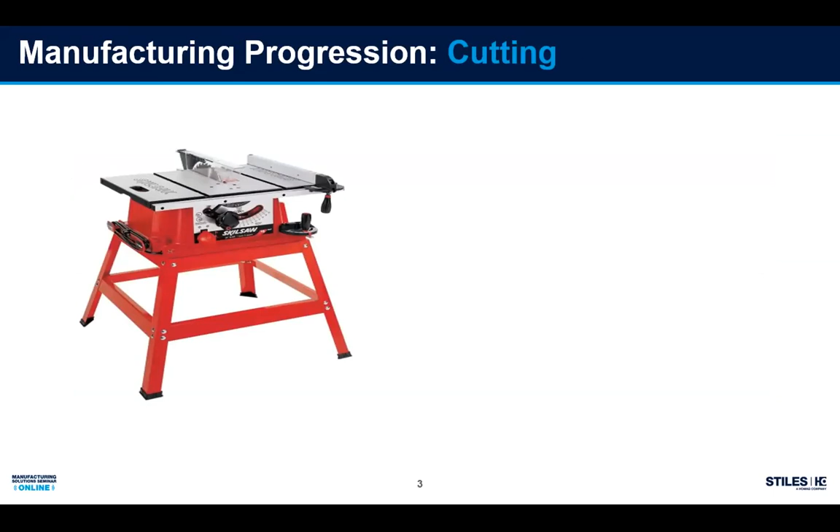As you started out in your company, you may have started with a simple table saw like this to do your cutting, and you realized, I need to step it up a little bit. I need more precision. I need more production. So you transition to an Ironwood sliding table saw, which will give you those things. But as your production increased, you could transition to something more automated. This HOMAG SAWTEQ is a highly automated, very precise way to cut your parts.

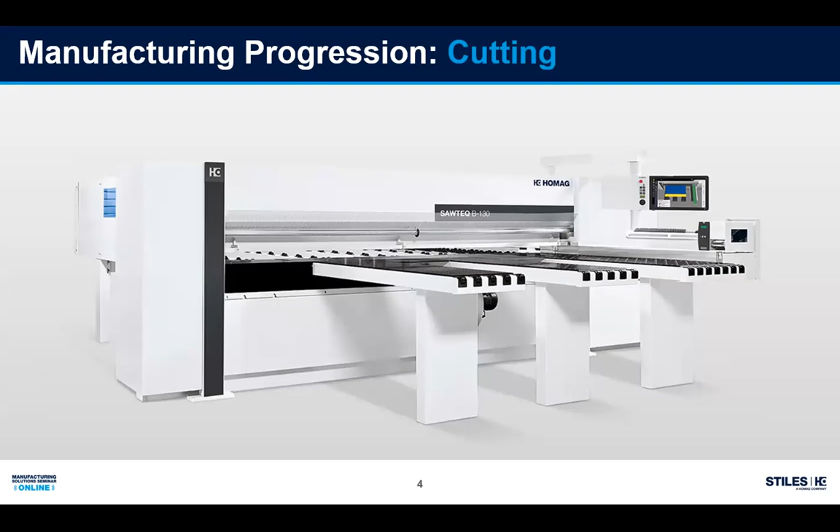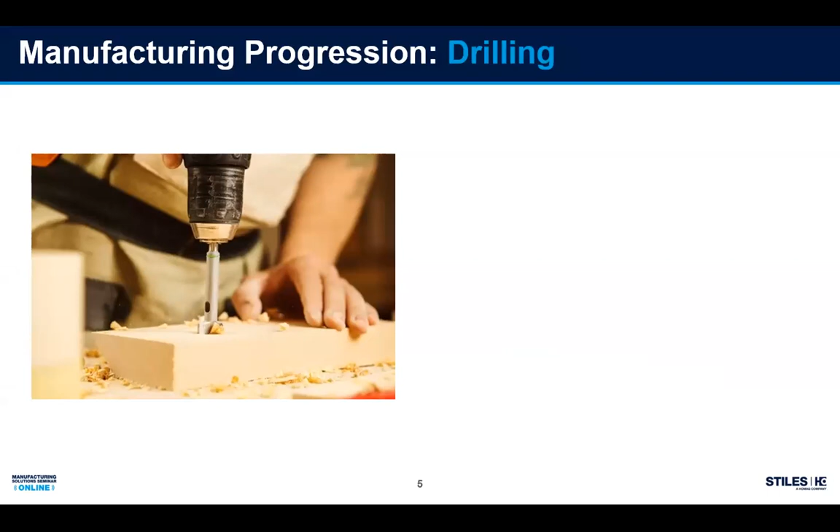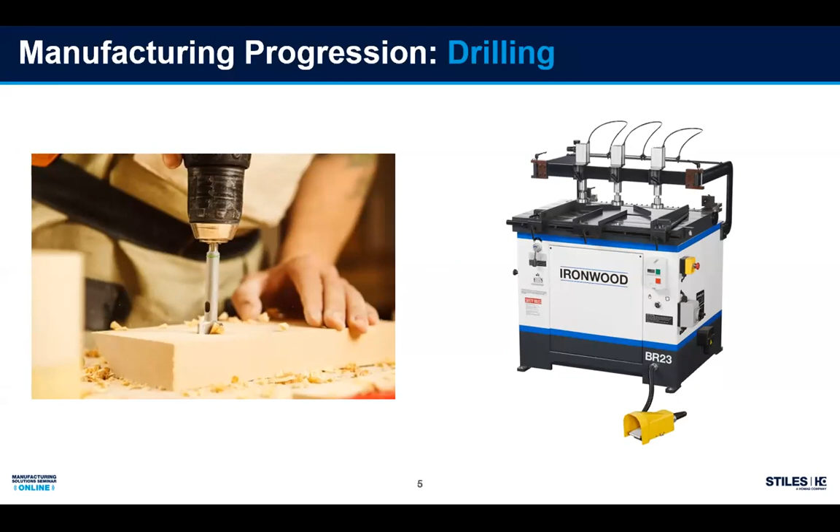As far as drilling, this is pretty antiquated, but shows a point. You had to start somewhere when you realized I need more precise drilling, more production. You transition to something like this Ironwood drill machine. And then eventually you possibly progress to this HOMAG DRILLTEQ series, which gives you the high automation and high precision for your drilling needs.

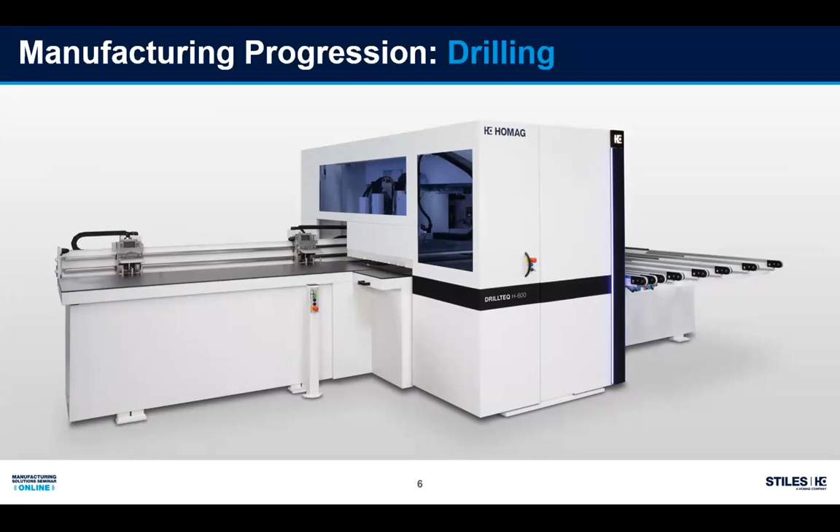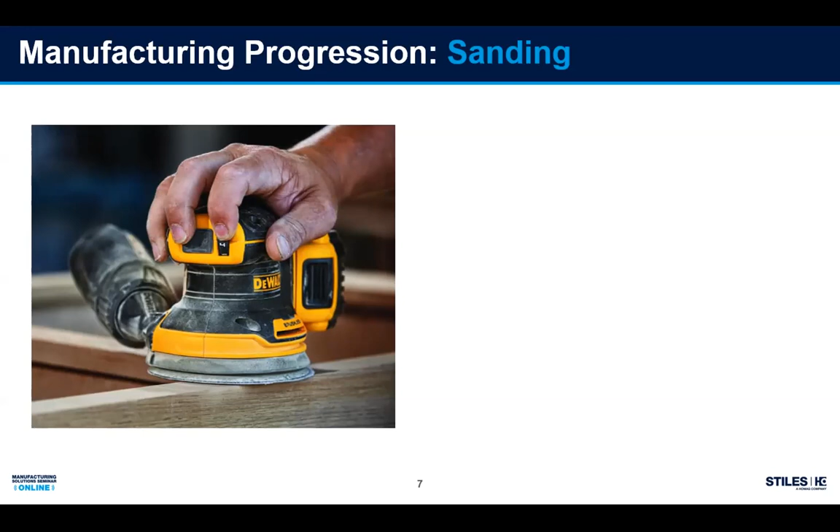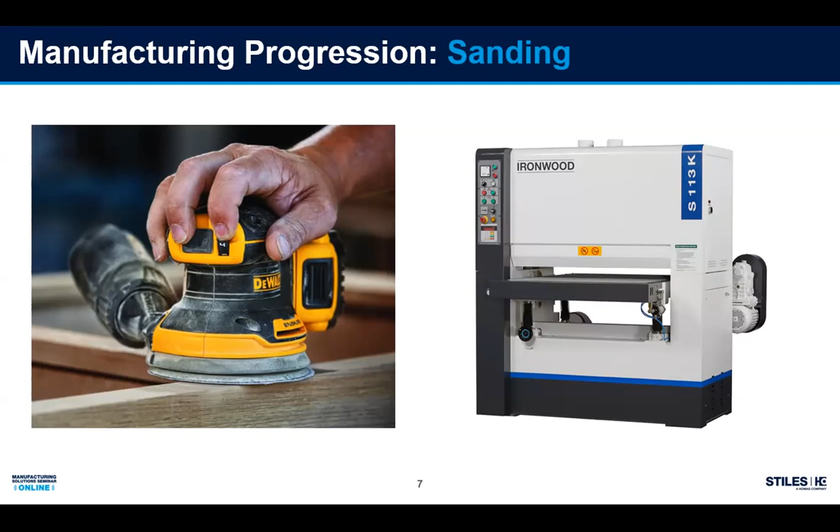The same way with sanding. I'm sure you've all used a hand sander. It does the job, but it's not very uniform in its sanding application. So you progress to, let's say, a mid-range wide belt sander. You can increase your numbers and get your uniformity of sanding part after part. But as production numbers increased, you transition to a more highly automated type, more precise with segmented pads and platen heads. So this would be your next progression in your sanding area.

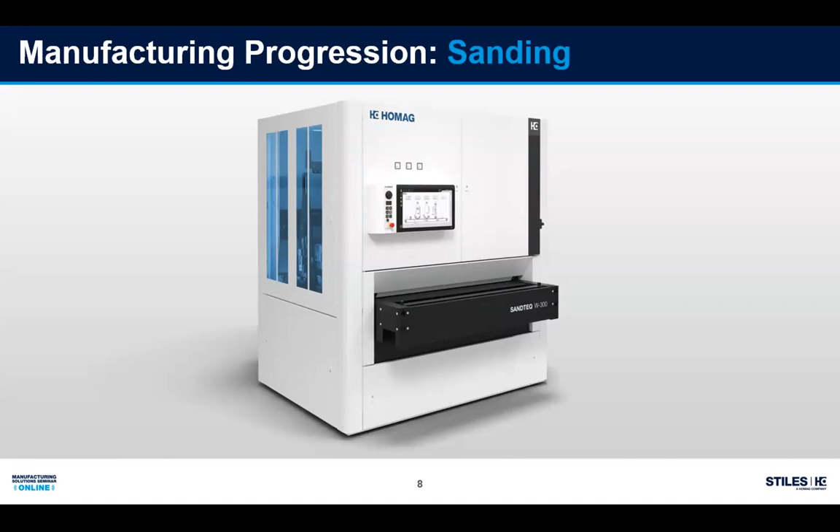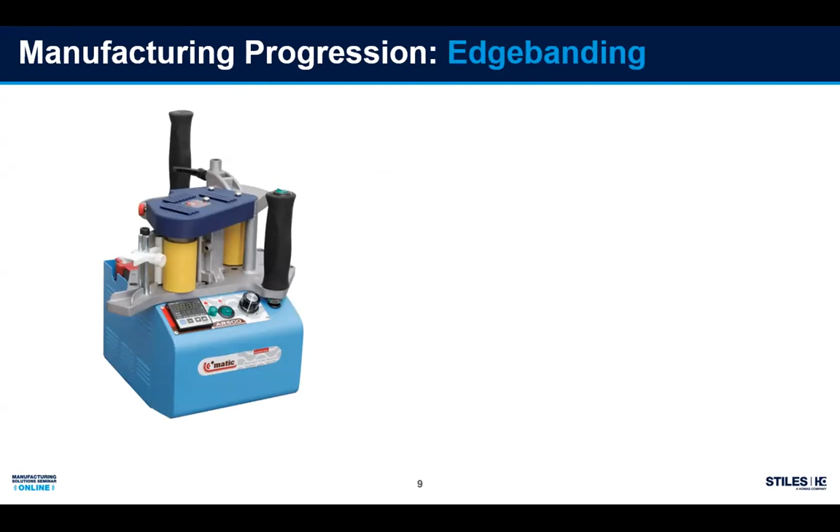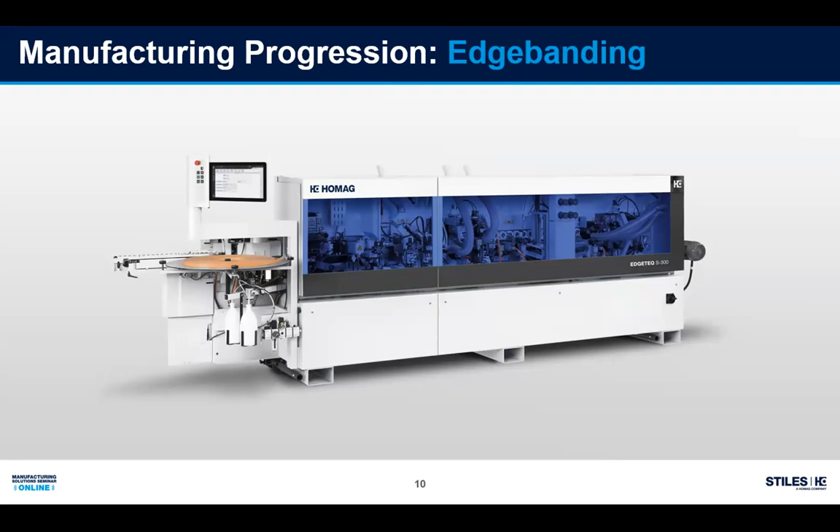So why did you make those changes in your other areas? Well, one of the reasons is efficiency. You waste less time, and like we mentioned before, your accuracy is greatly improved by making those changes. And that's going to improve your overall quality of your product. Those two combined are going to give you better production, which means increased profit.

Something you may not think about, but safety. If you notice all those things that we looked at early on in the slides, they were manual operations. So you have someone physically doing those jobs, and it can be demanding on those individuals. All those things add up together for cost savings, material and labor cost savings.

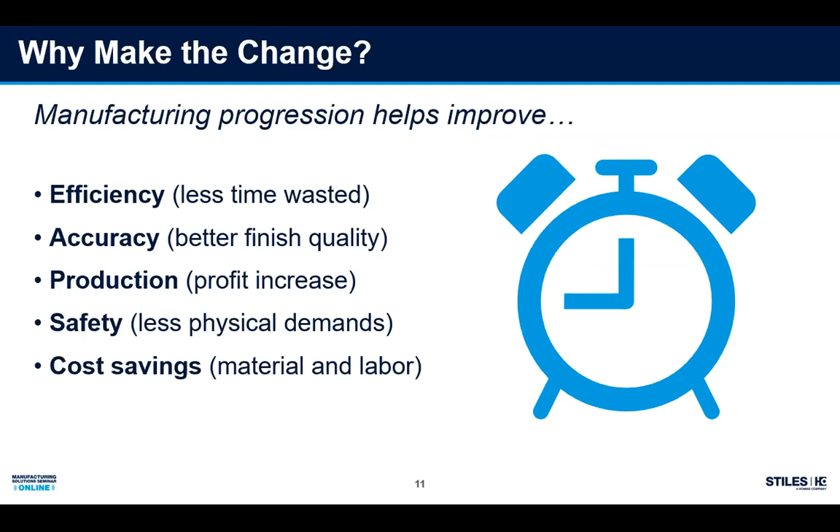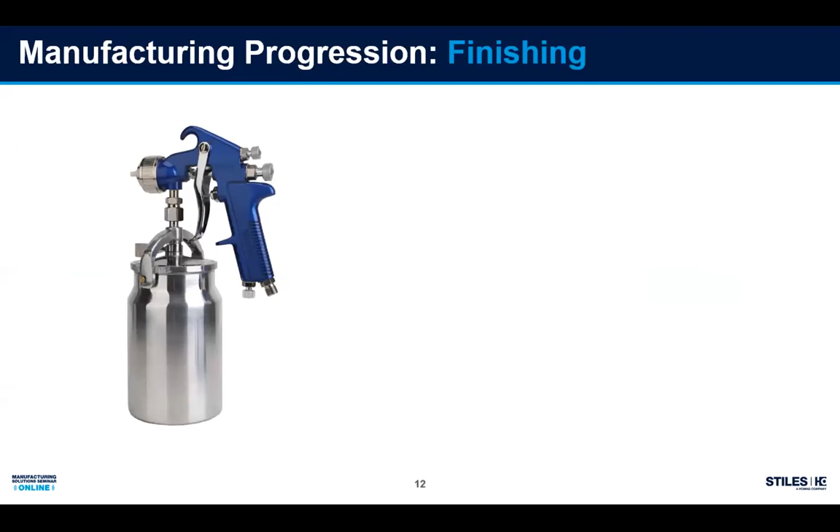The same thing could be said and done for finishing. If you've done any kind of painting at all, there's a good chance you started out with a cup gun. Now envision that cup gun holds a quart, a quarter of a gallon of material. It's probably 3 to 4 pounds of weight sitting there as you're spraying with that cup gun. You quickly realize my arm's getting tired, I need something better. So you probably progress to a gun attached to a long hose that's attached to a 5-gallon bucket, which allows the person to keep spraying.

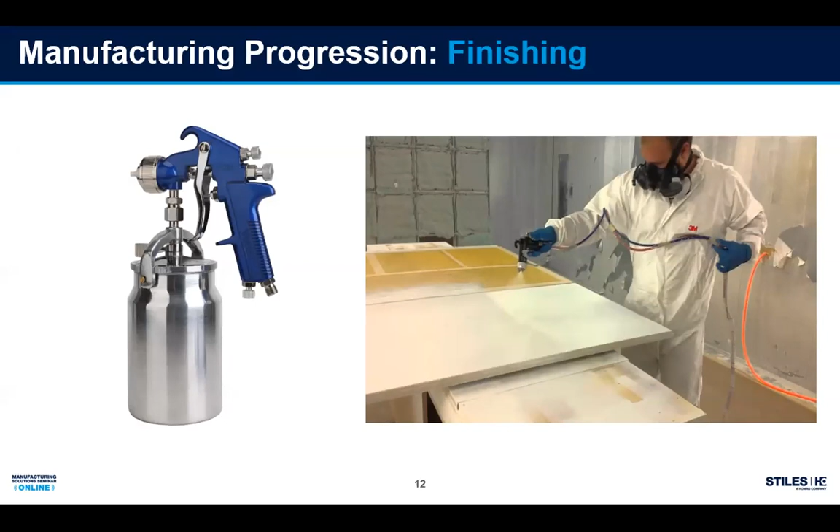But we need to think about something. Once he finishes that part, he has to put the gun down, take that part out, bring another part into the booth to keep spraying. The goal is to keep those guns spraying as much as possible throughout the day. Pay attention to those filters in the back and the walls. Finishing is a dirty environment, and that'll lead us into a point coming up in a couple slides. So we've gone from cup gun to a better way to spray manually.

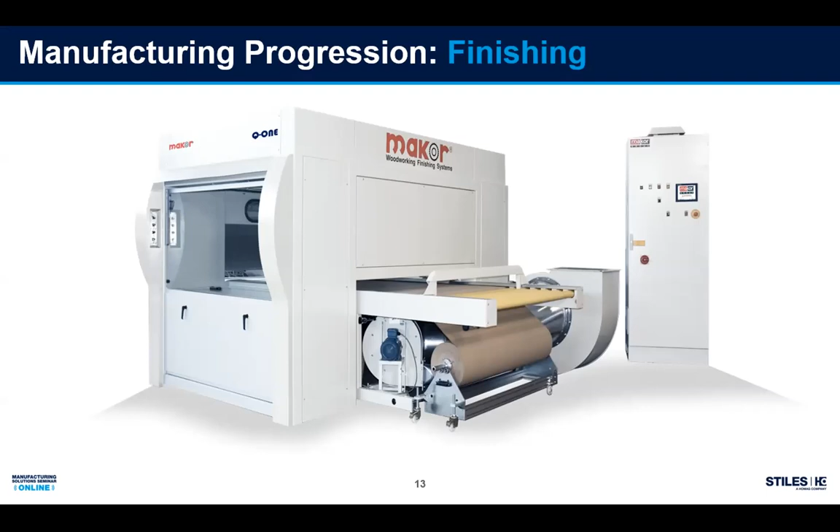And this is your solution for automation in finishing. We can greatly improve quality of application of the coating material, as well as production numbers. So let's talk about how you're doing your finishing today, manual spraying and transfer efficiency.

Transfer efficiency is the amount of coating material that you're spraying that's actually reaching the part. If you remember those filters a couple slides back, they were dirty, the walls were dirty. That's the material you've lost in that transfer efficiency.

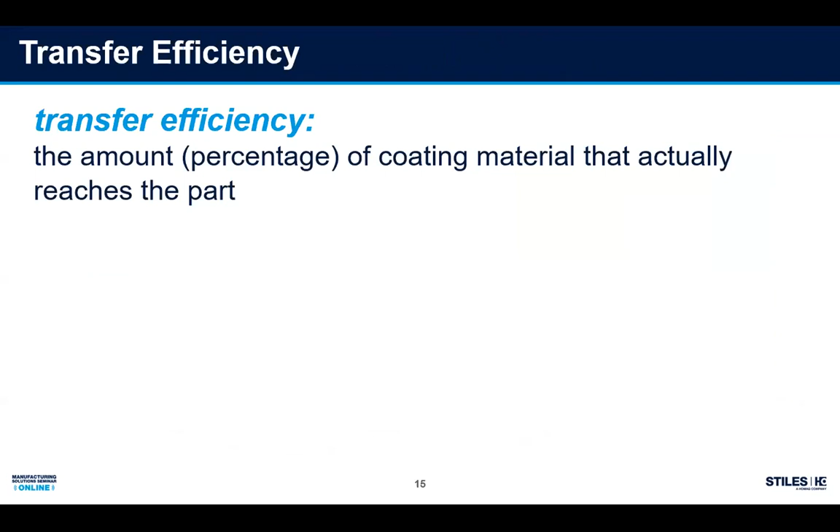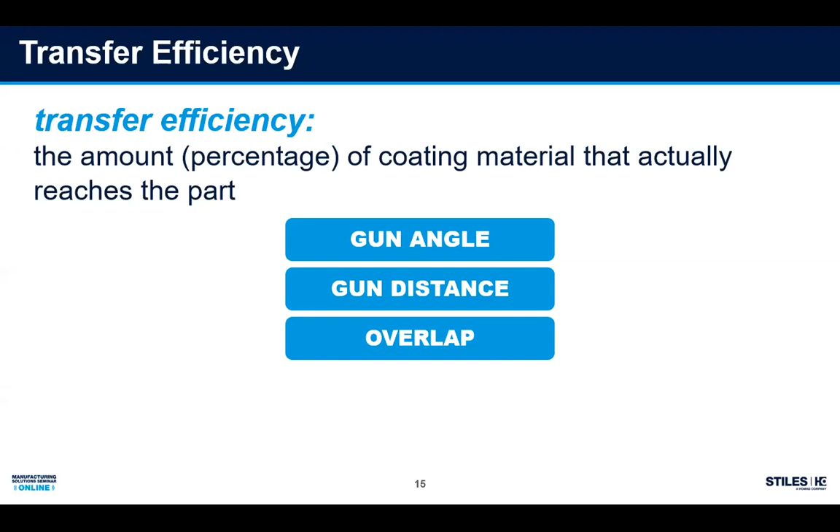What can affect your transfer efficiency, and in turn quality, is gun angle, the gun distance from the part, your overlap as you're spraying that part. Are you overlapping correctly? The stroke speed, you may not think about that, but it's very important. And also human judgment. If they're doing all those things correctly, they still could start out spraying great in the morning, but as they start to daydream and get tired, things can change.

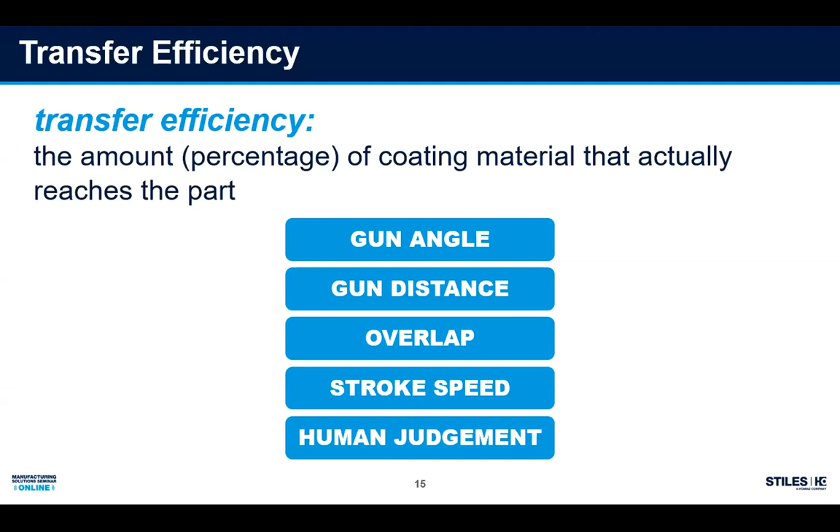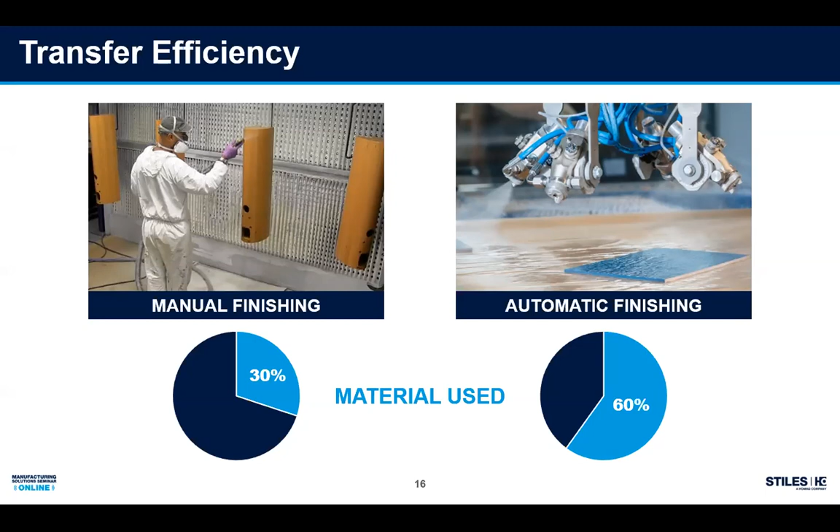Flatline finishing can give you 60%, and sometimes more, transfer efficiency. So there's an opportunity for savings. Let's say you're spending $100,000 a year spraying manually. Just by going to a flatline spray machine, we can save you $30,000 a year. Now you're at $70,000 a year, and that's your first opportunity to start applying that back to your return on investment for that spray machine.

So that sounds good, but how can a spray machine save you that much? All these five things here—let's look at each one of those.

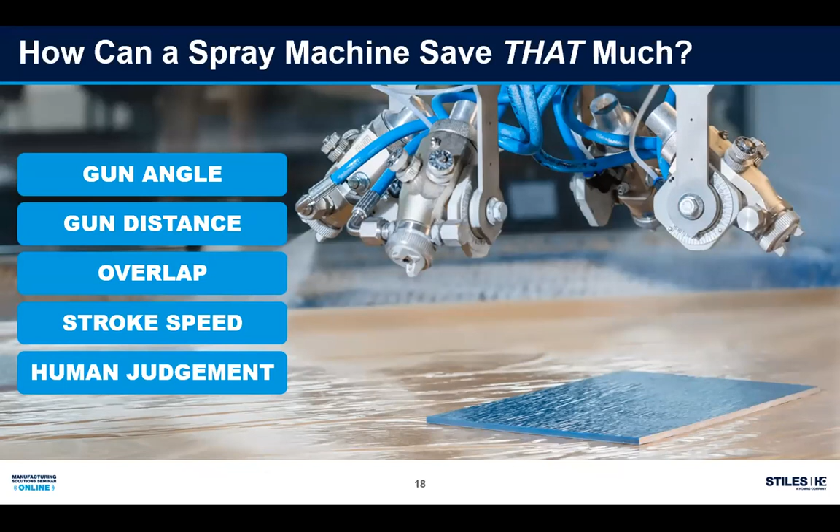But time and time again, if you watch sprayers in factories, they'll start cheating. They won't go all the way to the left and all the way to the right, so the coating starts to feather out on each end—a good coat in the middle of the panel and feathered out on each side.

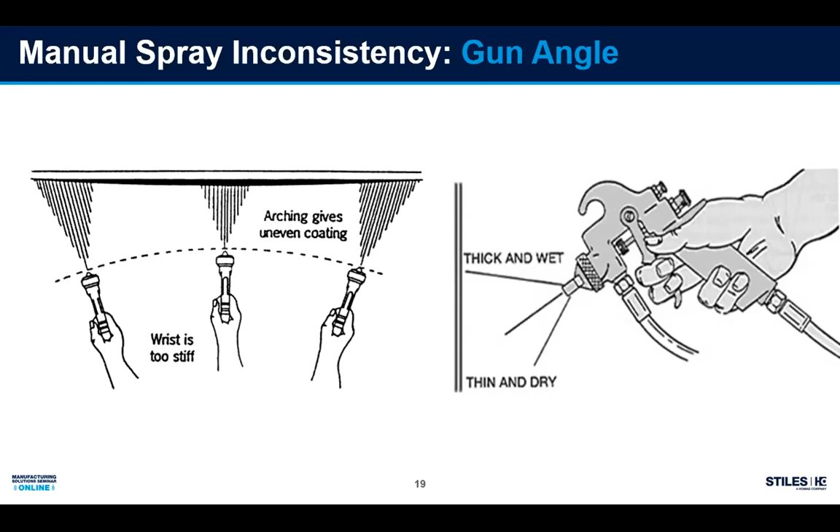On the other illustration here on the right, notice that the gun angle is tilted forward. It's not at a 90-degree angle, and that spray pattern coming out of that tip comes out in a V shape. So if you're closer to the top edge there, you're going to apply a thicker coat, and opposite of that, on the bottom side, it's going to be a thin, drier coat.

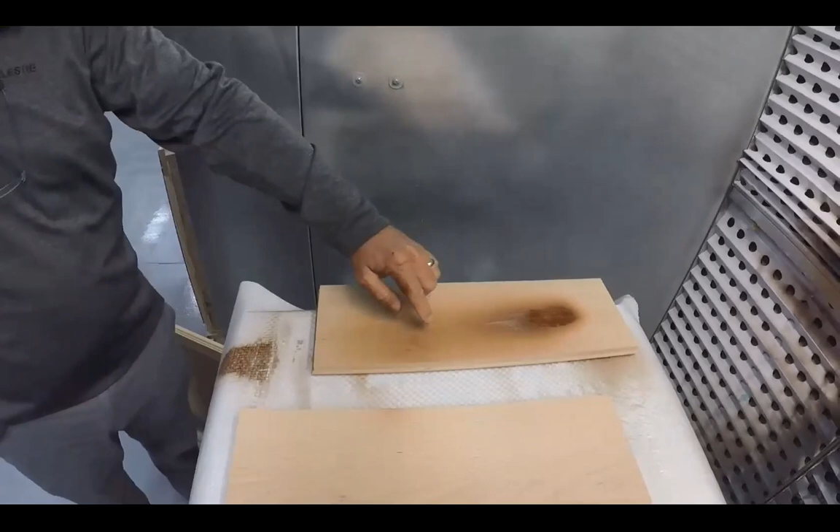Let's look at what that looks like in real life. Here, my gun is angled too far forward, and you can see I've sprayed way too much on the top edge of that pattern and not enough on the bottom. Here we're showing the opposite—my gun was tilted back. Now I'm heavy on the bottom and thin on the top of that pattern. So now I know when I'm spraying, my gun angle is important.

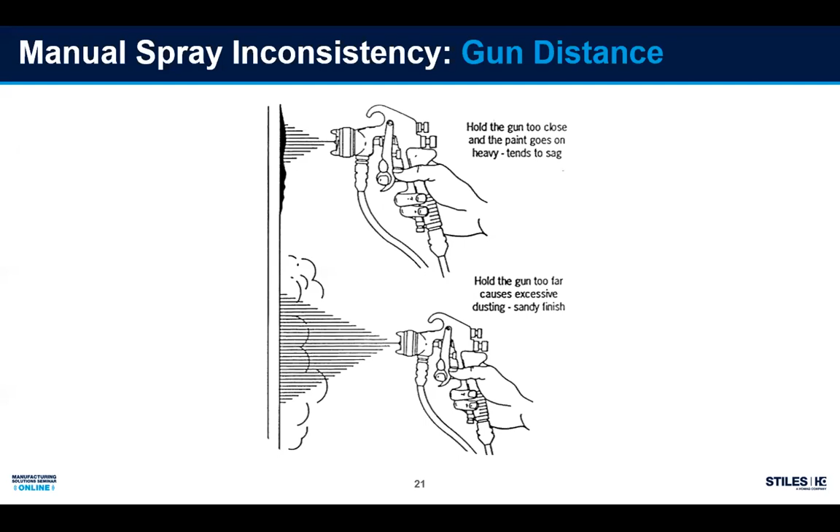Let's look at that in real time. Here my gun is too close—a narrow fan pattern, too much material. And then the second, it was too far away—it's kind of a light coat, not attractive at all. So as a sprayer, gun angle is important, and now I've got to keep in mind gun distance. I've got to be thinking about those two things.

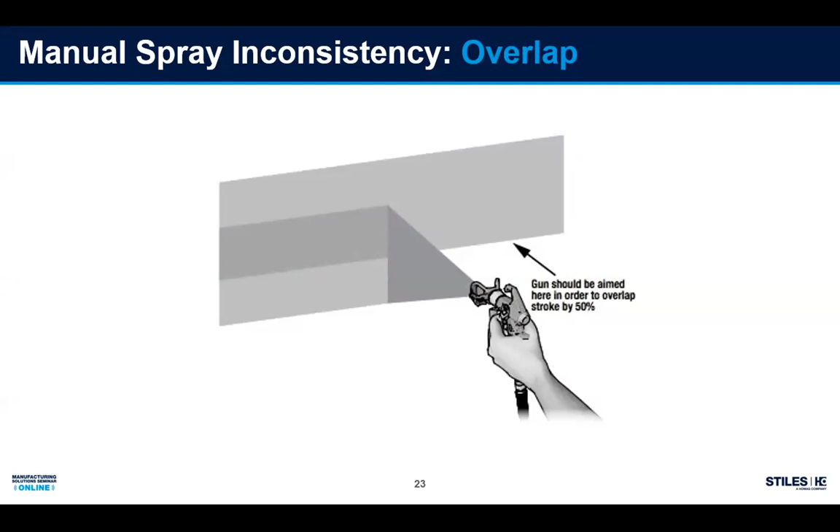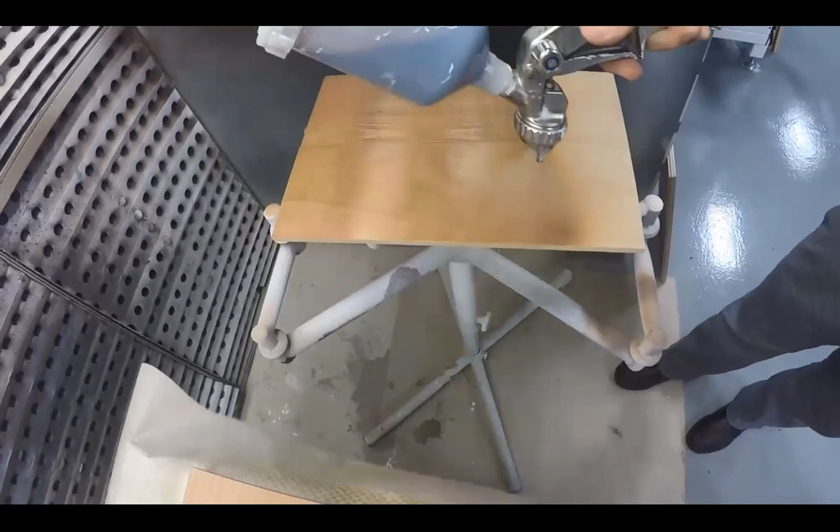Next, I have to think about, okay, I'm holding my gun correctly, same correct distance—I need to overlap my spray pattern. I need to overlap that pattern by 50%. So let's look at what happens when you don't do it correctly. Here's one pass—I didn't overlap. And now, an old term that's been used is 'cornrows.' It's missing areas, it's light streaks. Obviously, that's not what we want.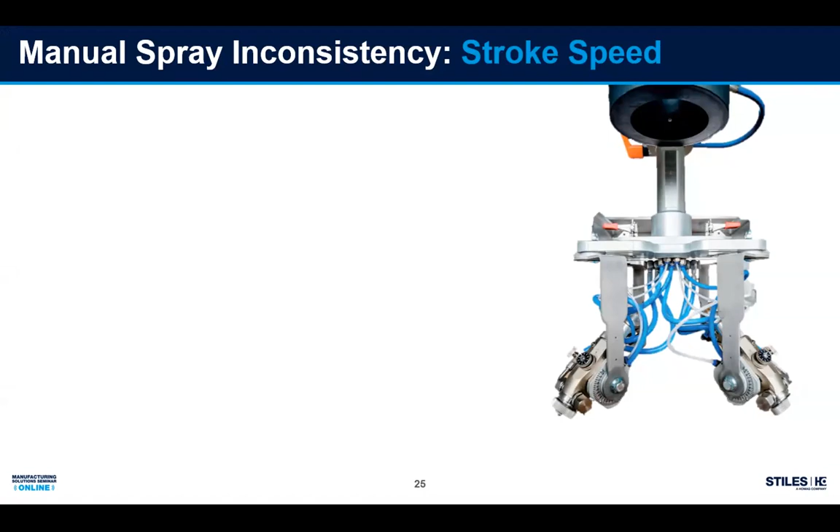So we also have to think about stroke speed and the overlap. One oscillation of a spray arm gives you a complete back and forth stroke. We know by oscillations per minute, in conjunction with the conveyor line speed, we can achieve the correct overlap part after part after part. You don't have to think about it, just load the parts.

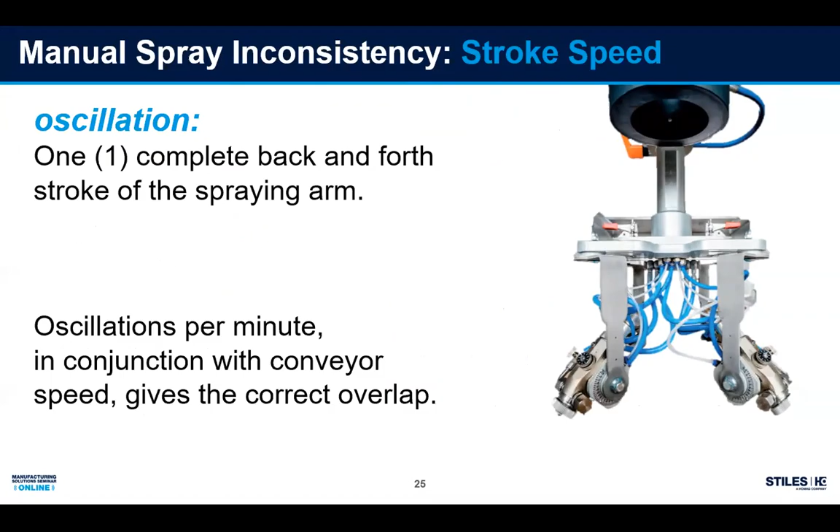So now there's 4 things I have to be thinking about spraying manually. I've got my gun angle, I've got to remember to keep that constant and correct. Gun distance, got my overlap to worry about, and now the stroke speed, all those tie in together. And if you miss one of those 4, you've got a problem.

So let's look at how we can improve on that. How can we take some of those variables out by going to finishing automation?

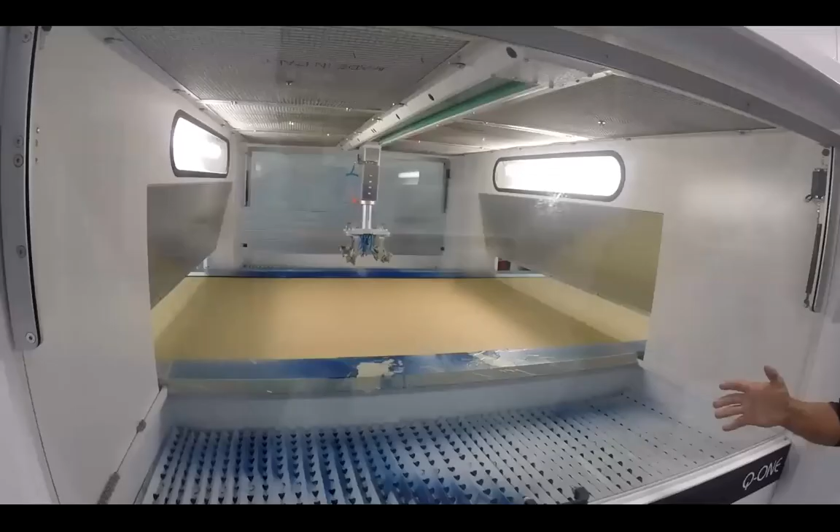Here's just going to show this spray arm traveling back and forth. Notice the speed is constant. The distance from the part is the same. Those guns are fixed, they won't move. We've got those locked in to ensure we spray a good coat all around your part. And that line speed, as it's conjunction with the number of strokes per minute, we know our overlap is going to be taken care of.

So, finishing has always been considered more of an art, but there's things that we can do, just like we talked about, to make some aspects more of a science.

So what is flatline finishing? Basically, it's a way to improve, it's a way to perfect what a human can do in the finishing area. We can greatly increase your throughput and your quality and uniformity of finish by moving to a flatline spray machine.

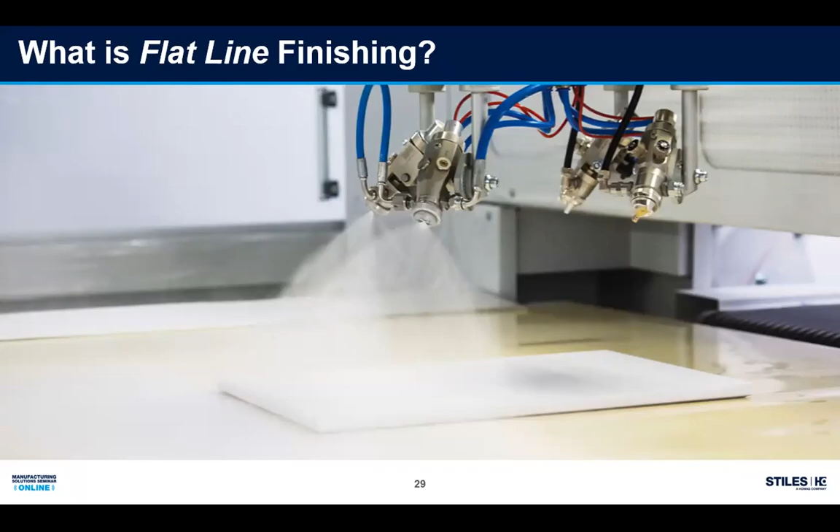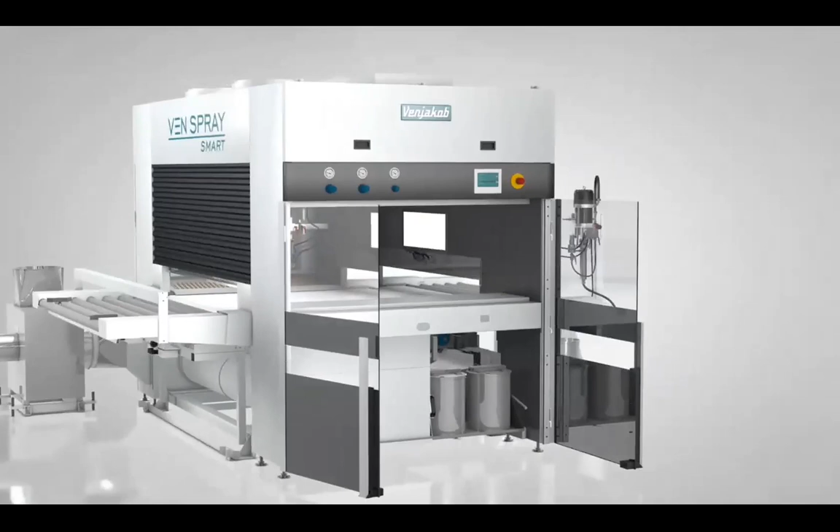Now, here's an example of an animation of what a spray machine does, how it works. This particular machine is a hybrid machine, meaning we can use a paper belt, or we can use a self-cleaning Mylar Teflon type belt to carry the parts through.

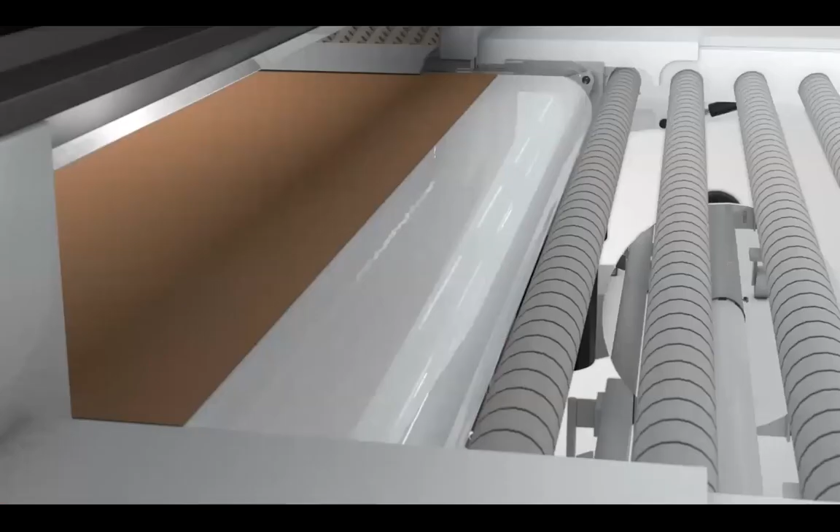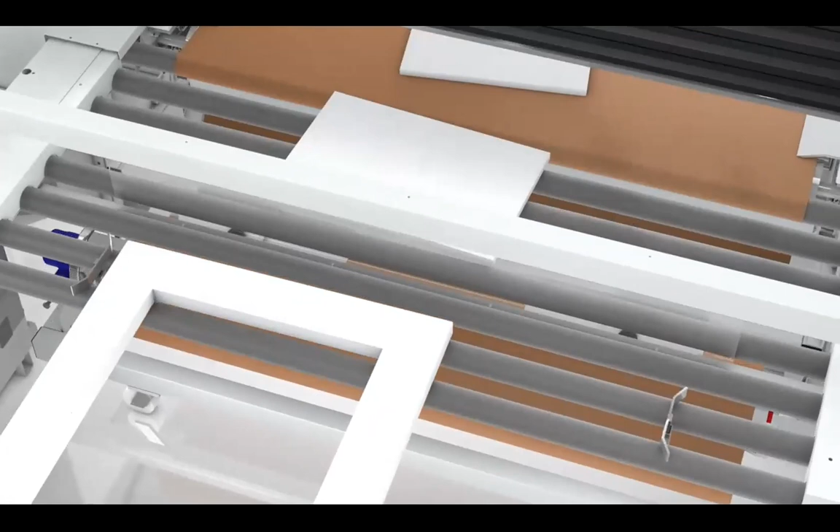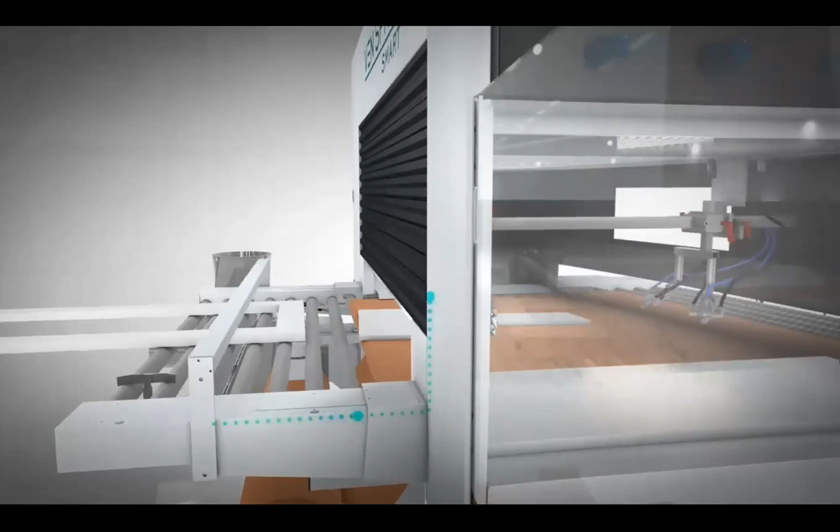Here we're moving, loading our paper onto our pickup roll, and we'll start loading our parts. Notice as the parts are coming in, there's a reading bar there, a sensor that's reading the dimensions of the part, so it'll know where the part's oriented on that belt and what that part looks like. And it sends a signal to the guns to fire off and on. This is how we can achieve a better transfer efficiency and get that 60% plus transfer efficiency.

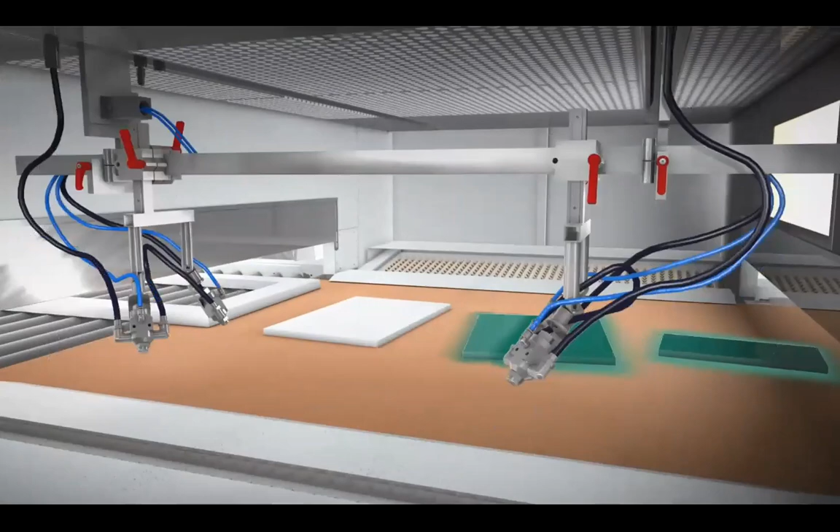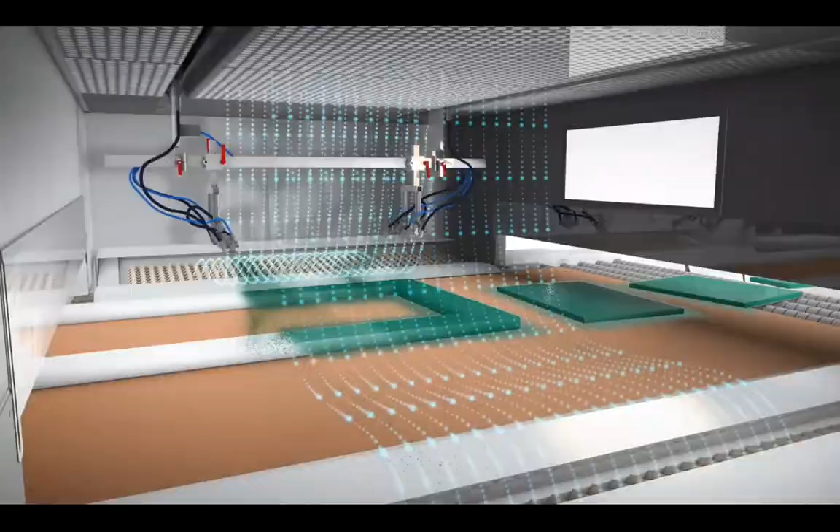Notice the overspray is being pulled to the side through the filters via fans underneath those filters. And we can adjust and set how much overspray actually gets on the part and how much is on the conveyor. We have fans on top that push air through filters, so we got clean air coming in, as well as fans pulling that dirty air through filters.

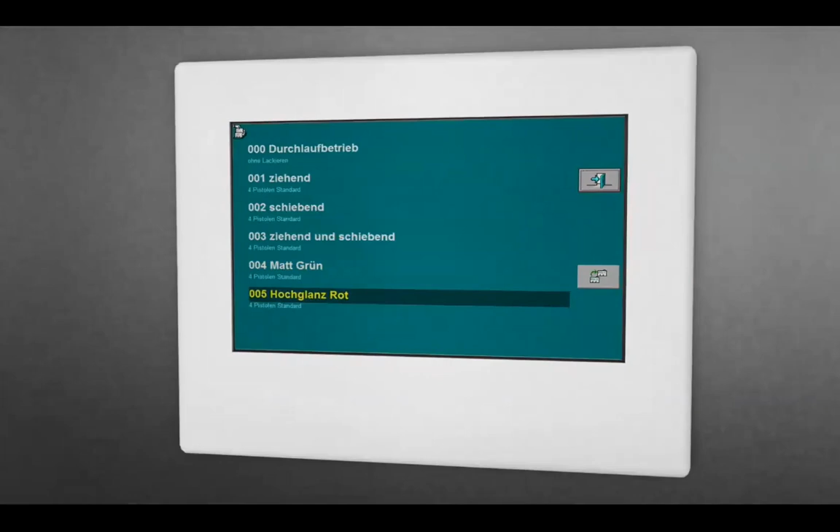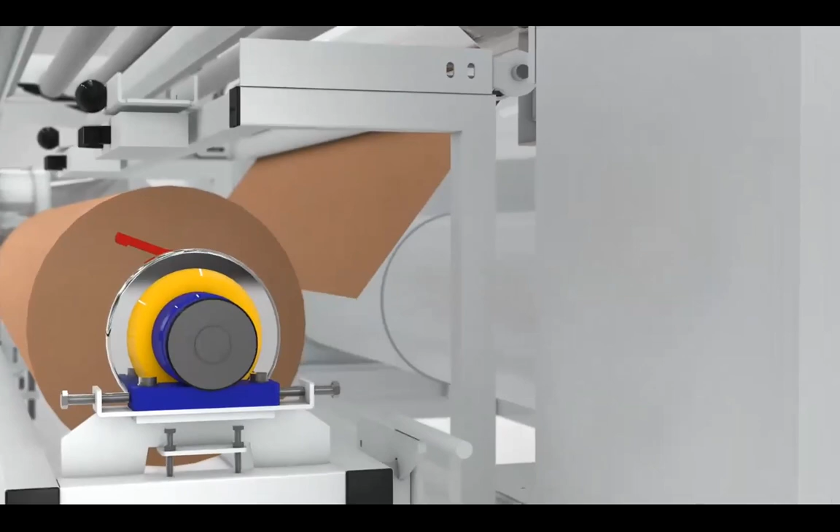We've ran our green using a paper belt, and one other thing, that paper in most cases could be disposed of in just like you would your filters in your spray booth. Just throw them in a dumpster. So we've ran our green on our paper belt.

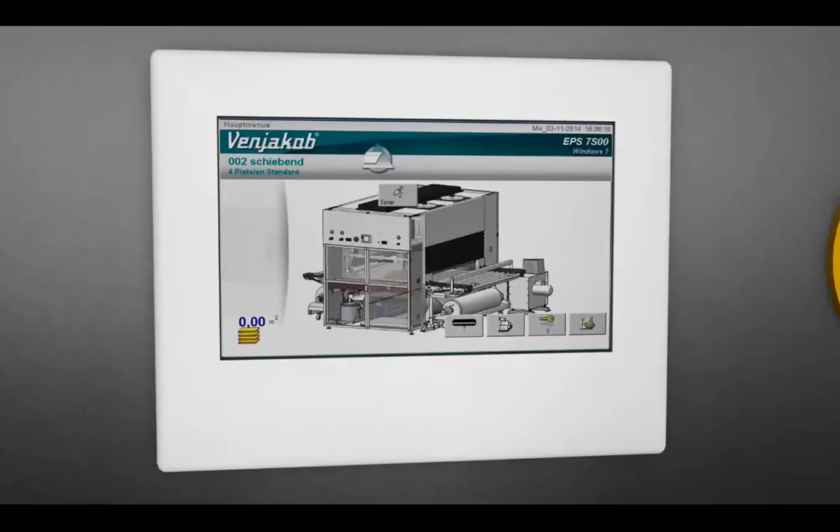Let's switch over and we're going to run red. We put our pickup tube into our solvent. We're going to flush the green out, switch over to the red. Here you can see that taking place.

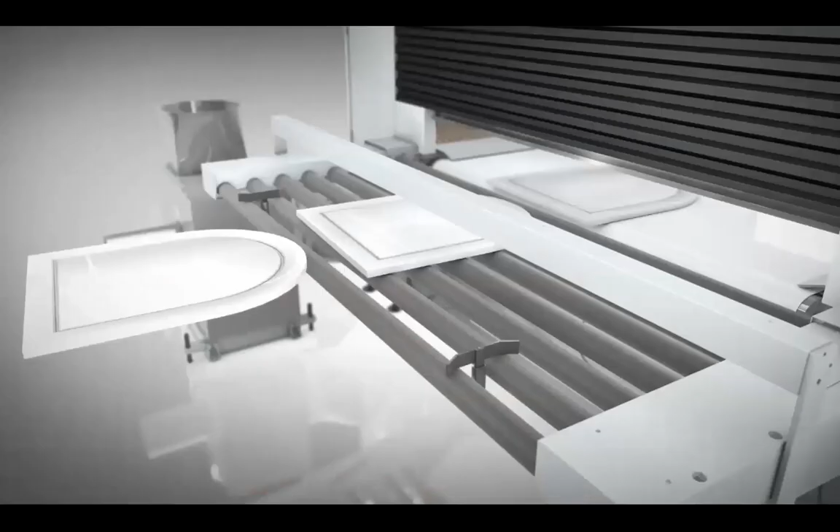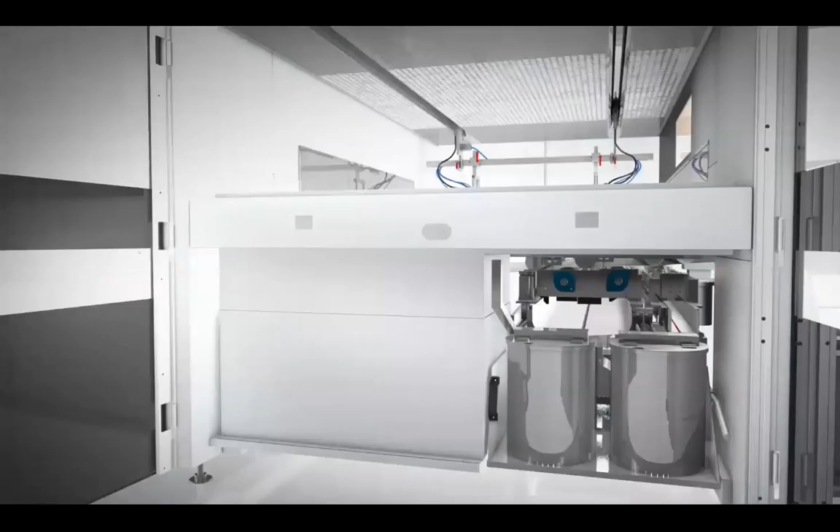And we're going to be spraying on a self-cleaning belt. Some people call it recovery belt. Here we're reading those parts, we're doing the same thing. Very, very efficient, very consistent in application. But the overspray now, some coatings we can reclaim and reuse. A lot of water bases we can.

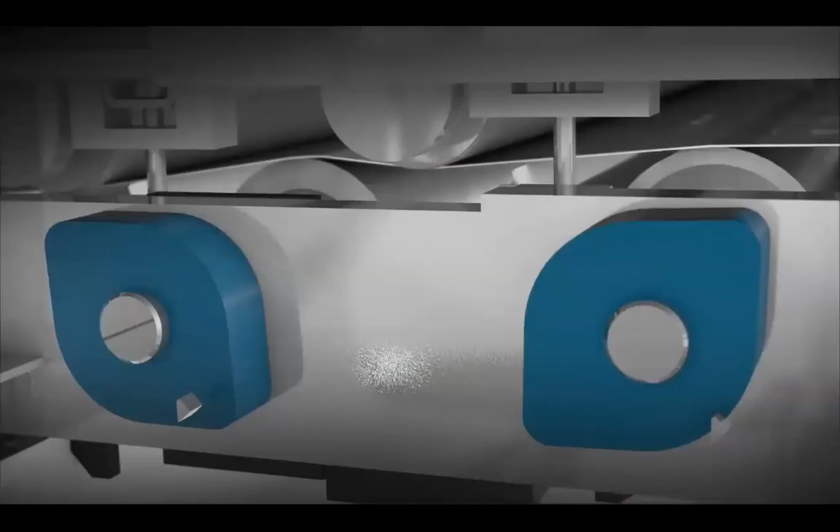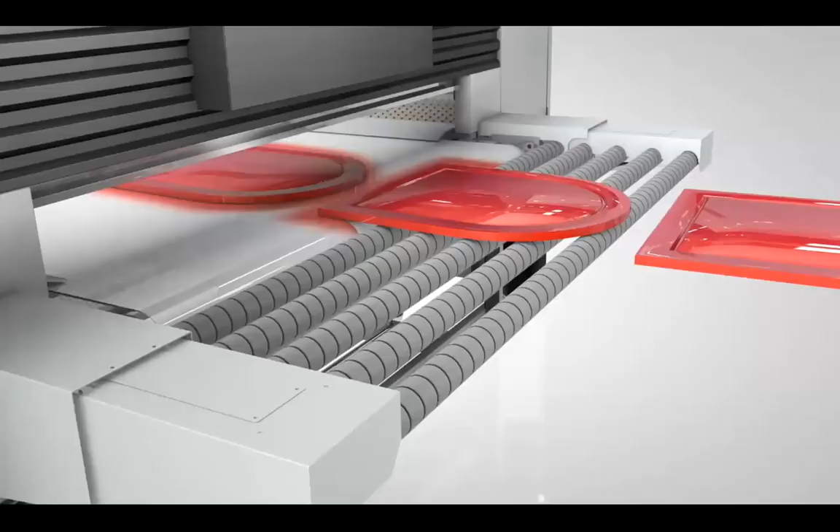So how this happens, our first initial scrape takes place, and we'll clean 95% of that belt. That product that we scrape, there's a chance we could save it and reuse it. The belt continues on down, and solvent is applied via a roll, and it's scraped again. So each revolution of that belt, we have a clean surface.

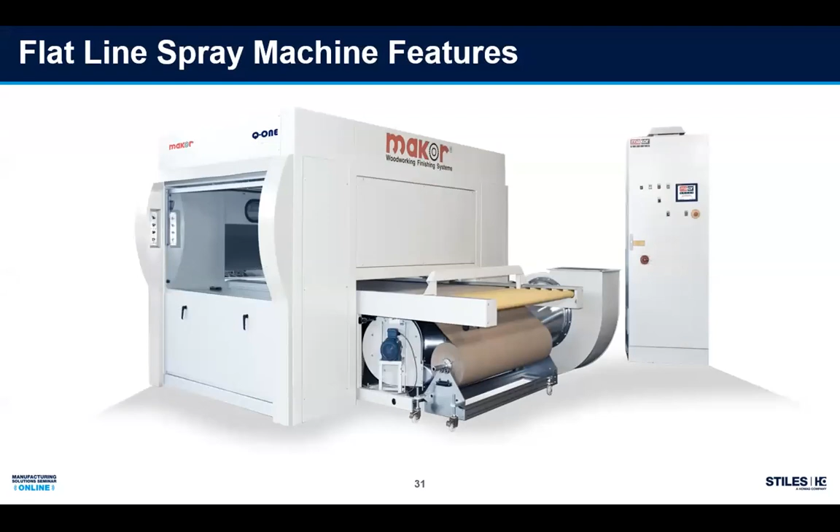Let's look at some common features of a flatline spray machine. First of all, the industry standard is 51 inches working width, meaning we could run 4x8 sheets through this machine and still get edge spray coverage.

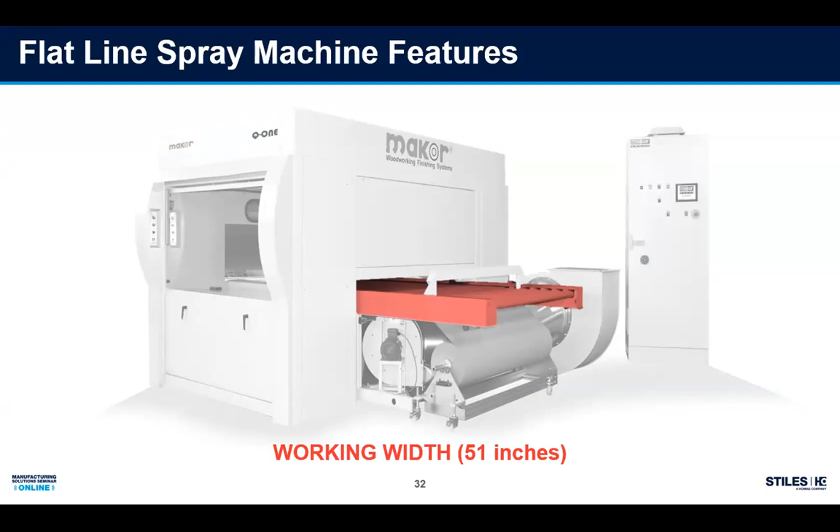We talked about paper or self-cleaning. There's two different ways to use a conveyor belt. Here we're happy to show a paper belt.

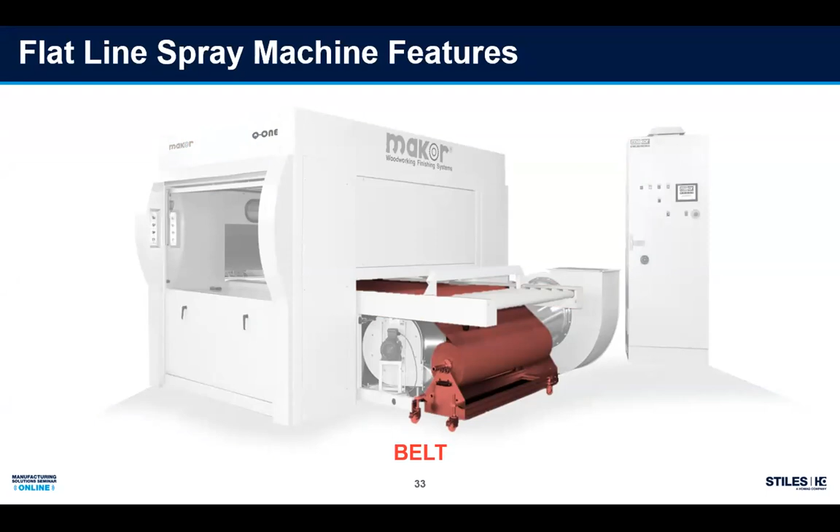That reading bar we talked about has a series of photo cells, spaced out about 12 millimeters or roughly a half an inch. So it's a very precise read that tells the guns when to fire on and off.

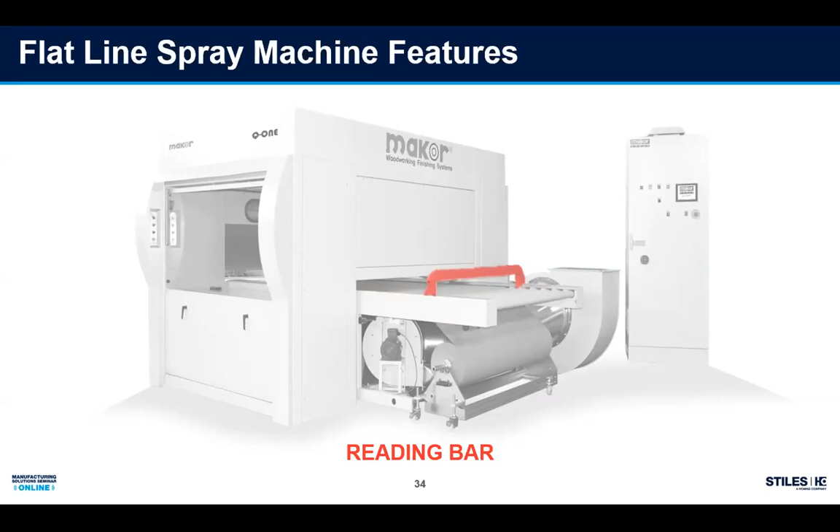Here we have an example of a large overspray exhaust fan. Some fans are placed underneath the filters on each side of the machine. This particular model has a very large fan, which is good for helping pull that overspray inside the spray chamber through the filters, and it gives us a lot of flexibility. The larger the fans are, the better we can control keeping that chamber clean inside.

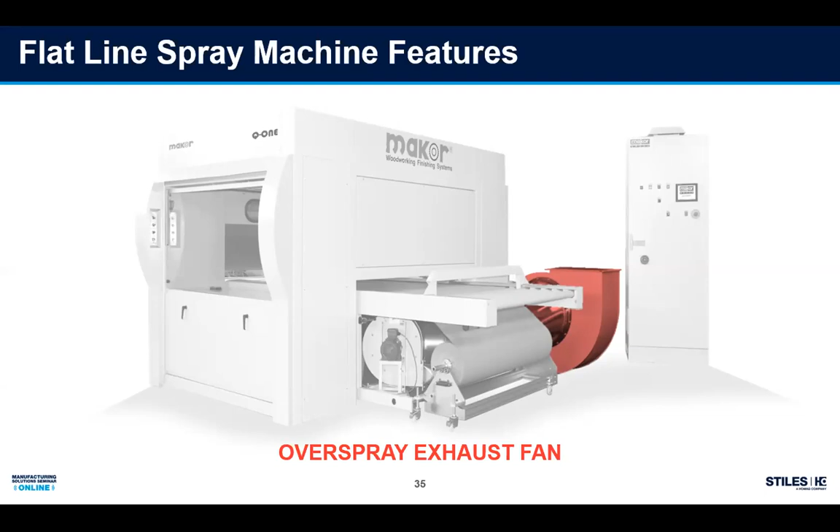As far as the control panel, we have a very intuitive HMI, or human machine interface. If your operator can operate a smartphone, he can definitely operate the control panel.

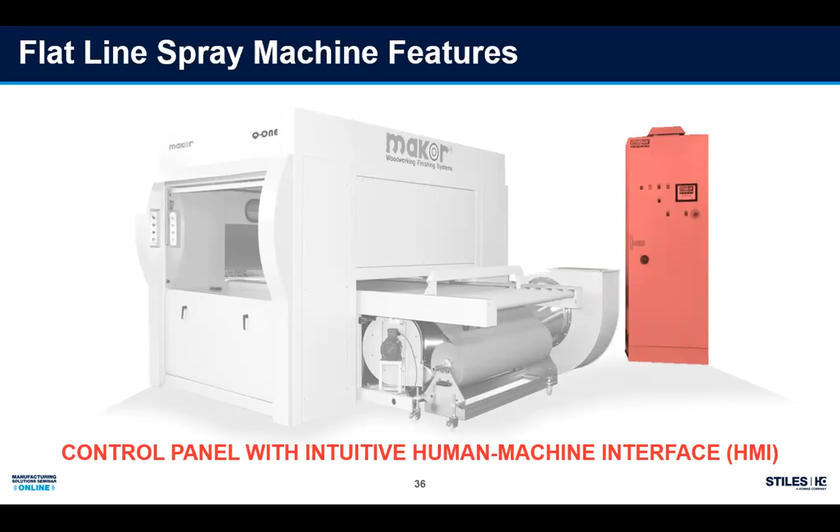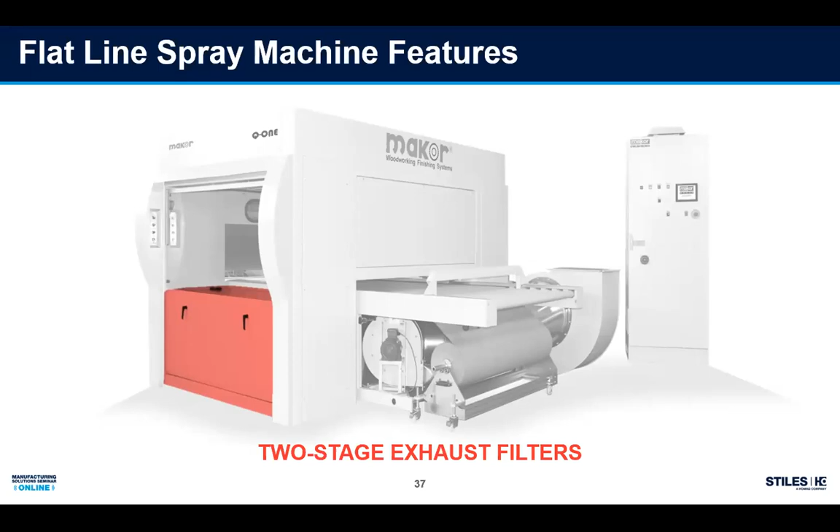On the sides of each machine, that's where our filters are, and we have what we call two-stage filters. You'll have a section of filter on the top of that filter box, as well as another set underneath. So we're cleaning that air, and we have two opportunities to clean it. One reason that's important is we don't want to be exhausting overspray outside, but the cleaner that air is as it goes through your fans, the longer those fans will work correctly. So two-stage exhaust filters are important.

The reason for that is the faster you want to run, the more material that has to be sprayed, so we need a larger area to expel that overspray.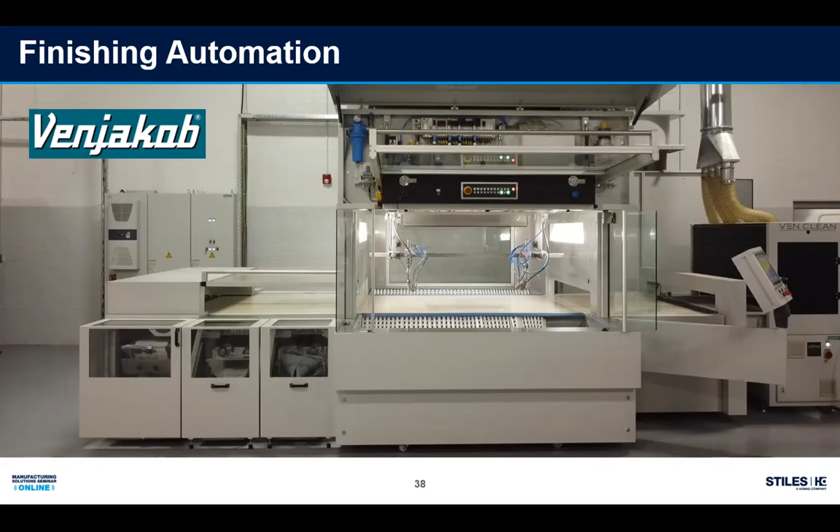Now we've looked at flatline. Here's an example of an even better way to perfect how a human sprays. This is an Evolution, a Makor 5-axis Evolution spray machine. It's great for coatings or especially glues — you could spray any kind of glue application for laying up your vinyl wrap or whatever you want to glue up.

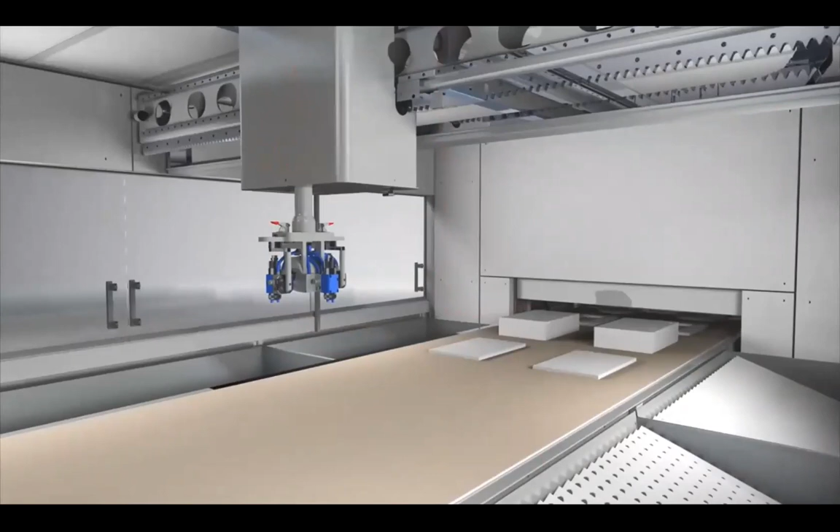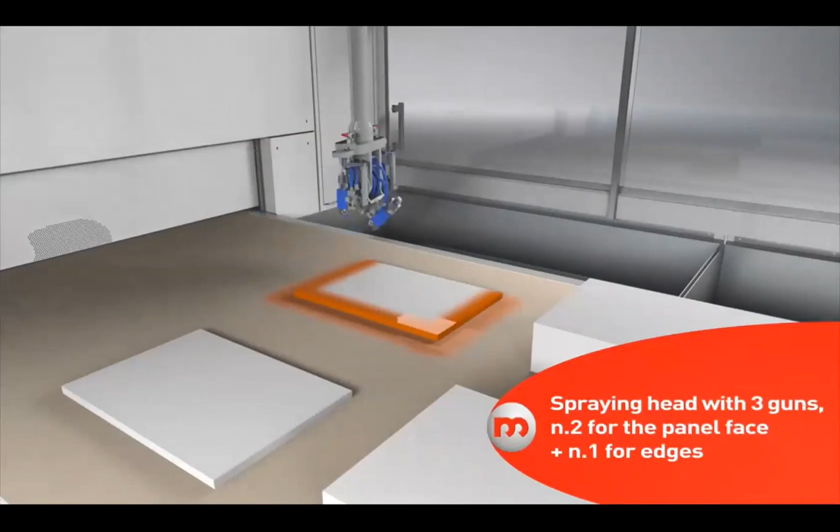The 3D scanner is not just reading two-dimensionally like our other machines — it's a 3D scanner, so it reads the orientation of the parts on the belt. Notice the gun angle changes to mimic more of what a human can do, but it's the same speed, same distance — that angle is constant, so we're perfecting what that human can do.

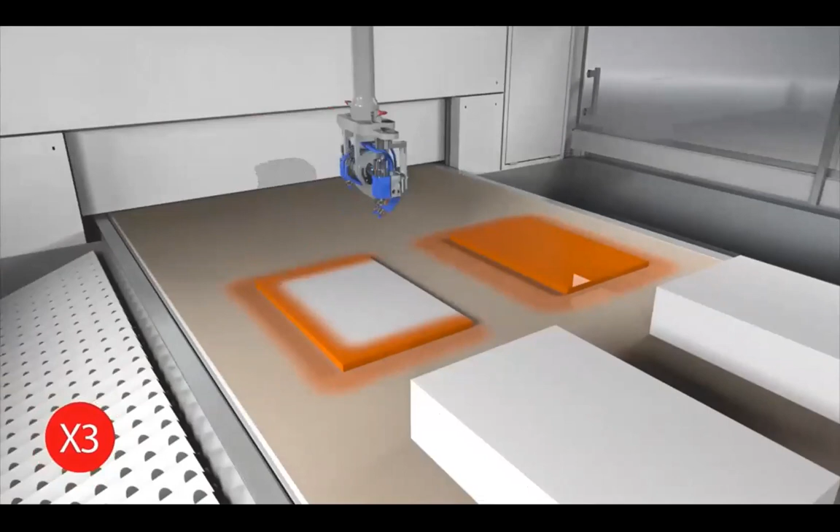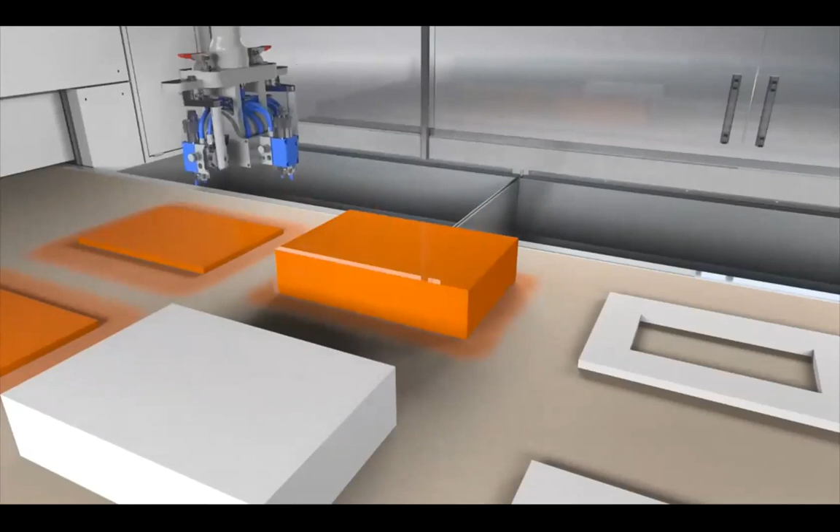Now notice it's going to take 2 passes on these tall edges. That 3D scanner realized that and tells the guns, okay, we got to make 2 passes, and now we'll do the top. That feature is very important — we could program it, for glue, to spray 2 passes on the edge and then a single pass on the top.

Notice as it sprays this one, it also read that there's an opening here, so it needs to spray those edges as well, kind of like you might have on a face frame. It'll finish up the top and continue on.

We can spray parts up to 5 inches tall, and in some cases, with some modifications, we can do parts up to 12 inches.

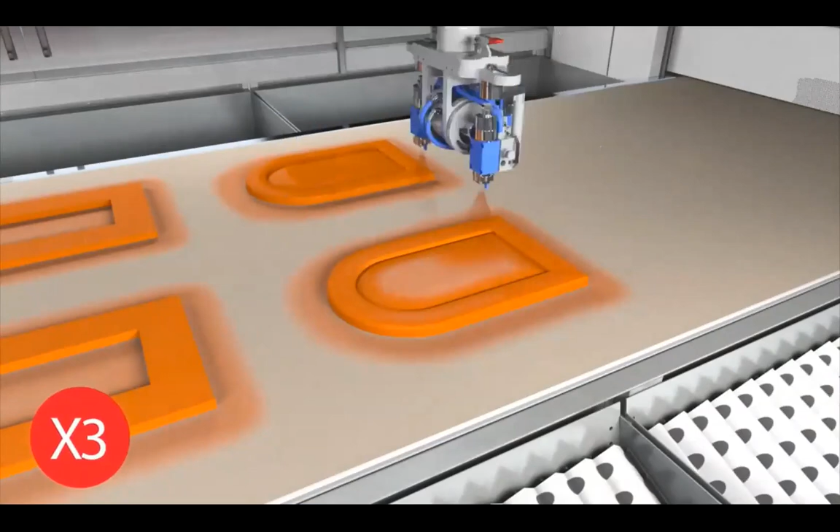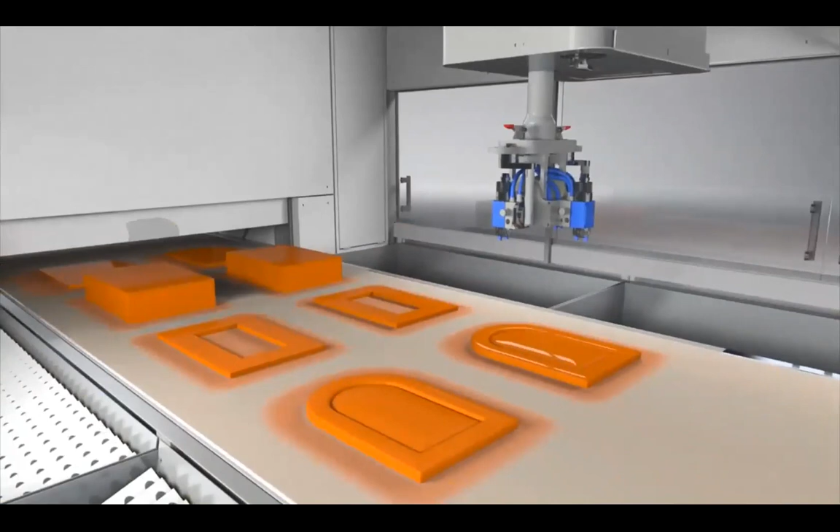So that's a great way to, like I was saying, mimic what a human can do, but it's going to be consistent part after part after part. It doesn't get tired, it doesn't daydream. It's a great way to automate your finishing.

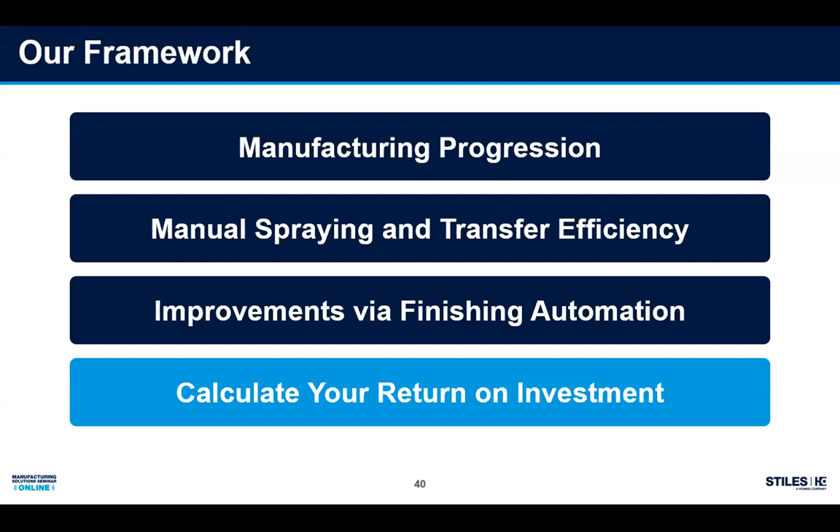Now let's talk about your return on investment. We know over the years, a typical standard kitchen consists of about 300 parts. If we say 1 day equals 8 hours and a labor rate of $25 an hour, we've seen if you have 3 people in your finishing department, it will take them 3 days to finish those 300 parts.

Resulting in a labor cost for that project of $1,800. Now, if you have a flatline spray machine, you'll still need those 3 people, but without a doubt we can greatly increase your throughput. We can now do that job in 4 hours, from 3 days to 4 hours. So that's amazing.

Freeing up 2.5 days. Now that project, that same kitchen, same 3 people, is costing you $300. So that's a $1,500 savings, which is huge. That you can apply to paying off your machine, as well as the coatings, and it's awesome.

So there we saw labor, we saw the savings there. Coating savings we've talked about. Energy savings, how does that come into play? Well, if you've gone from 3 days of having to run your factory, run your exhaust, your spray booth exhaust, and now you're down to 4 hours, there's going to be some energy savings there. And you can utilize those 3 people somewhere else in the facility.

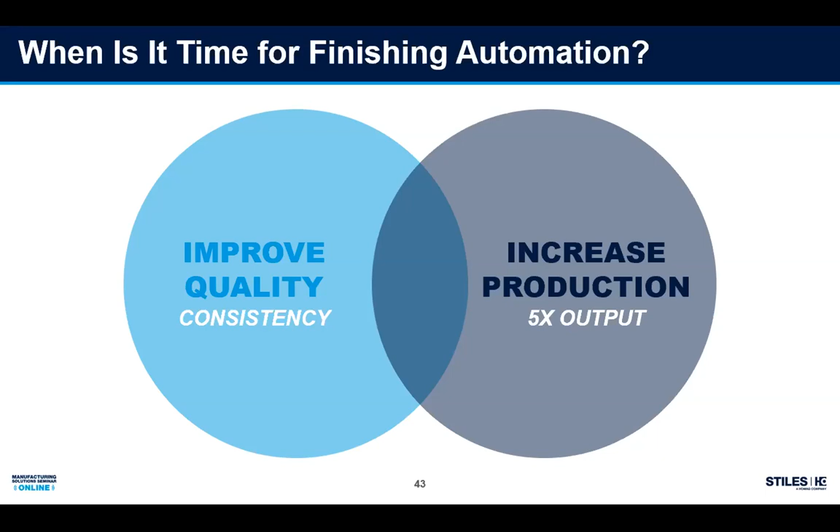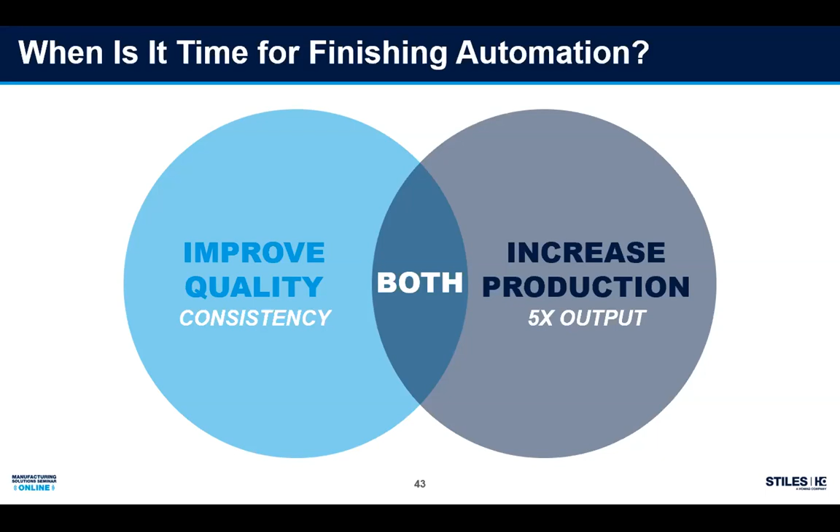So what is your goal? Let's answer the question, when is it time for finishing automation? If your goal is strictly to improve your quality, if you have trouble getting sprayers or keeping them, them showing up, and that's all you want to be concerned with, for sure we can greatly improve that. If your goal is production, hey, if you got a new contract, I have got to be able to produce more every day, we can increase your production by 5 times the output. We can take care of that. But in most cases, it's a combination of both of those. When you can improve both, that's what we run into the most, and that is going to give you what you need when you go to finishing automation.